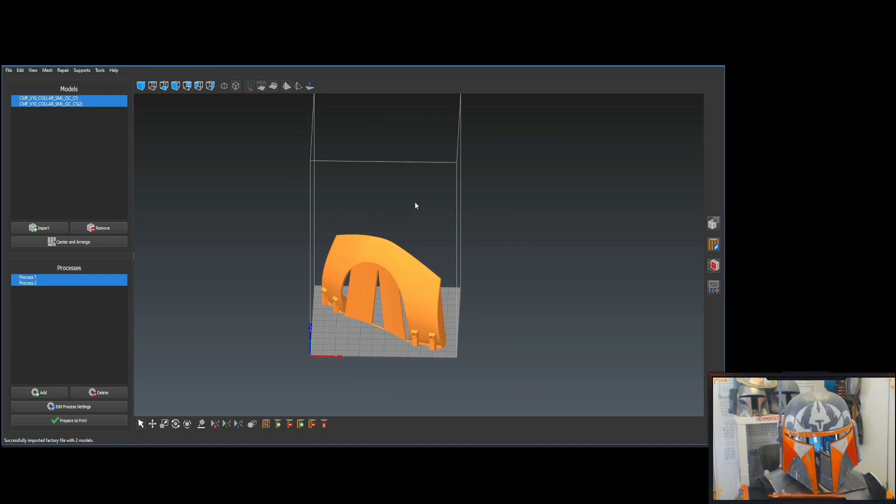Let's bring in - I just did a chest plate and a collar plate, so let's do a collar first, and we'll bring in the small because that's the standard size. I've already separated these parts out, but let's say you just brought it in as one piece, so I'm going to combine this back.

This is Simplify 3D, Cura, Prusa Slicer, and now Orca, the new darling of the free slicer crowd, and it's really nice. I'm probably going to start using that exclusively here soon. They have similar functions - in Simplify 3D it's separate connected surfaces, in those other programs it's split to parts or split to objects, and those are different. I have a video addressing that on the YouTube channel that talks about it specifically across all the different slicers, so go check that out.

So you'd want to separate your parts, and now you're going to have, in orange, here's the model. This is what we want to keep, and this is what we want to get rid of. So we're just going to delete this - this is what you'd do in one of your other slicers too - and then we're going to export this.

We're going to export it as an ASCII STL or even an OBJ. Let's do it as an OBJ, because the ASCII STLs, for some reason, when exported out of this program, are very large files. So let's just create a blank folder.

I'll call this Armorsmith Demo, and let's call this the V10 collar. We're going to get rid of CS because it no longer has custom supports. And we're going to go ahead and bring this into Armorsmith.

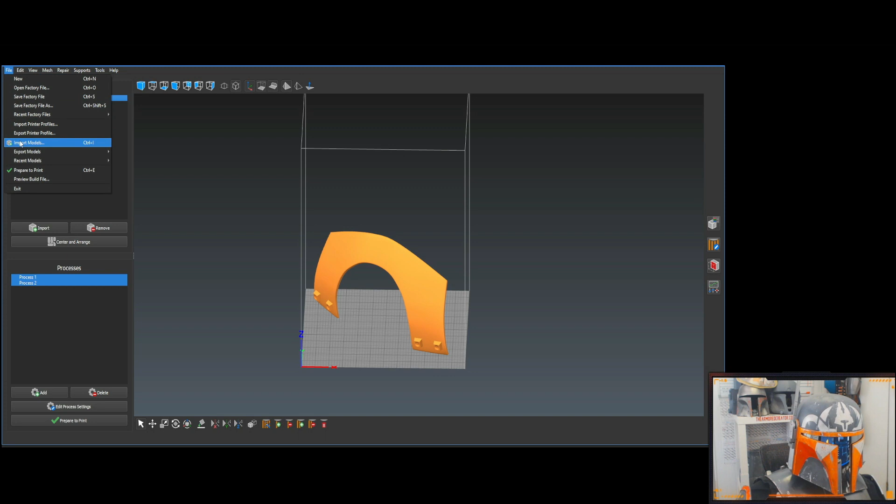We want chest plate, alright let's go. Oh, why is it going back here? No, that's a factory file. Okay, we want to import a model - sorry about that, I know I'm totally dragging ass here. Let's go ahead and get the right model. We want chest plates, and they are not in this folder, they are in here.

2022 updates again, and here we go. All right, so let's bring in this one - actually, bring in this one. Oh, look at this, we don't have the custom supports. Okay, cool, so let's just go ahead and bring that into here.

Let's catch up on the chat. We're caught up - wow, quiet morning today.

All right, so we've got two pieces of armor here. Now what do we do? Okay, well here's a really cool thing - so you've got your avatar, right? So you're going to select your piece of armor, and you're going to go down here to attach.

And you'll see it brings up all of these little cog wheels all over the model. There isn't one really for the collar plate, so what I'm going to do is just attach it to the neck. All right, so here we go - now it looks really strange, right? It's all in the wrong place.

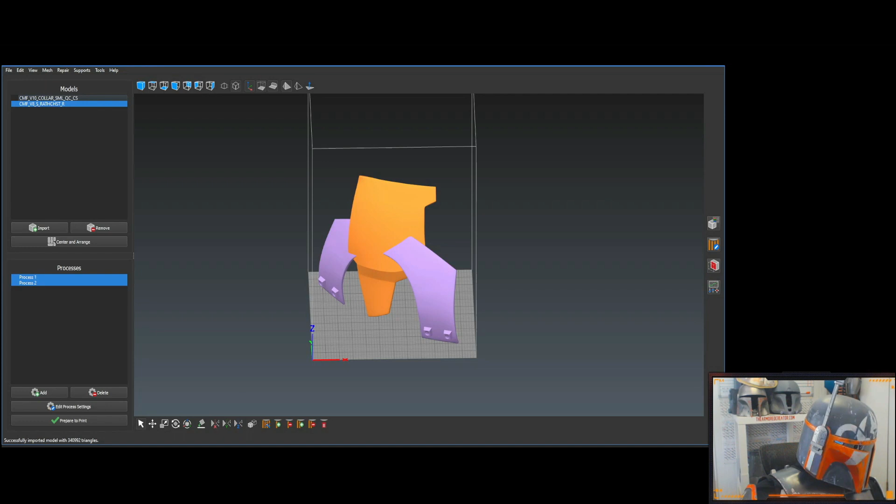When we had this collar plate open in Simplify 3D, we have it at a very strange orientation. We've got it rotated straight up and down, so let's hide this, or just delete it actually.

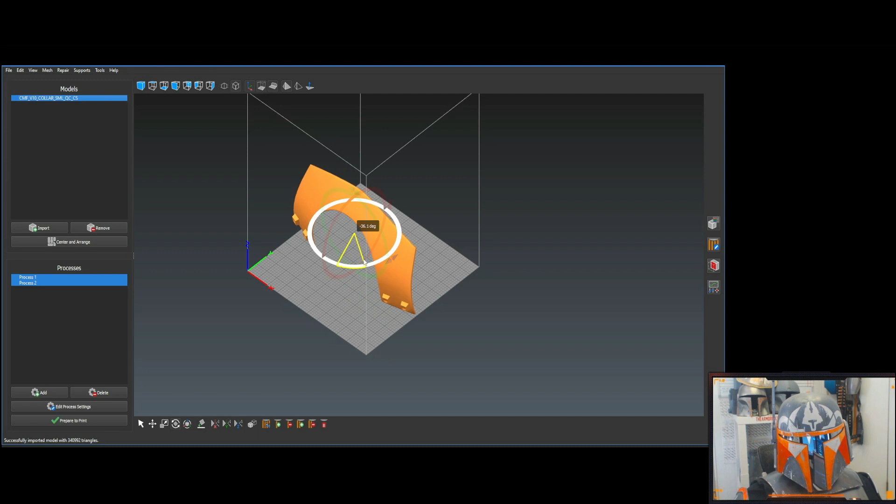What you might want to do is pre-position your STLs before you bring them into ArmorSmith. Don't change their scale yet, just pre-position them so they're more into the correct orientation that you want. We can verify this by looking down and lining up with this grid here. Let's get that again because it's moving around. There we go, okay, so that looks pretty good right there.

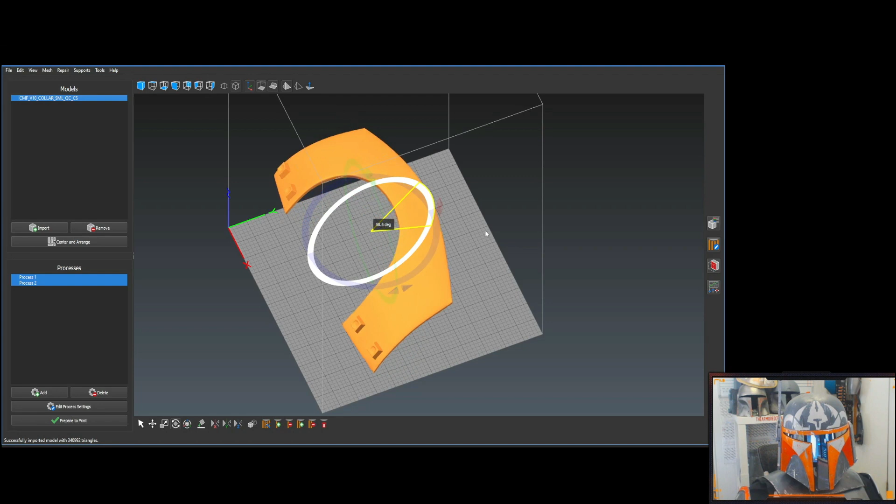And then we're going to rotate this thing from the side so it's more in line with what it should be. And then I think we need to flip it around 180 degrees. So we'll go ahead and re-export this.

And we'll re-export it as an OBJ. Go back into blends. Where's my customs? Oh, I guess that's out here. Customs, alright, and we'll resave it.

And now what we'll do is we'll open ArmorSmith back up, and we're going to select this and delete it. Then we're going to re-import it again, this time using the import button, and go back to our folder that we need to be in. That's not it. Alright, here we go.

Alright, so we got this again. This should be more in the correct position this time, I hope.

Sometimes when you export things as an OBJ, in fact, let's try that. Let's export this thing as an STL and see what happens, see if there's a difference in the orientation of the model that's exported. Export as STL. Alright, we're in the same thing, so we'll get rid of the QC and CS because we don't need that.

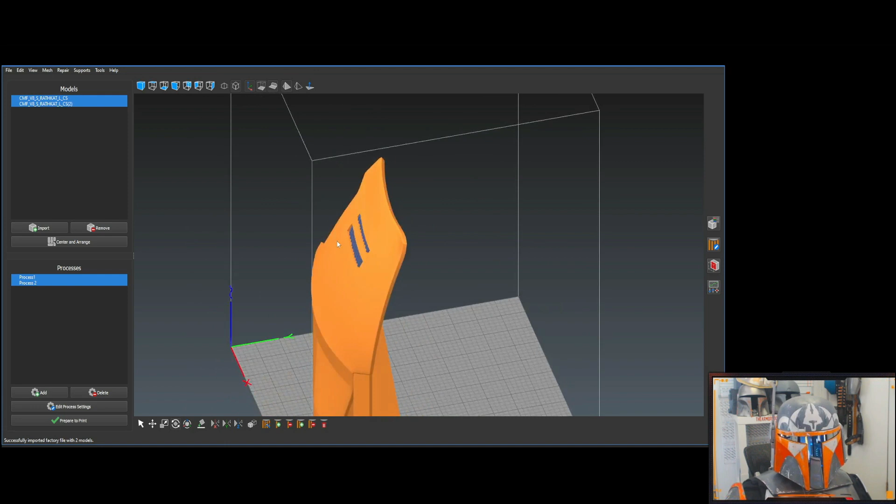So all my different sizes of this chest plate have the same size opening in the front and the back. I'm going to clear everything off. So here's what you want to do to be sure about how to scale this thing, because you can scale in your slicer too. You could use ArmorSmith if you wanted to get a good baseline scale. So let's remove all the supports. Let's delete the custom supports, and we just have to make sure we don't save this file.

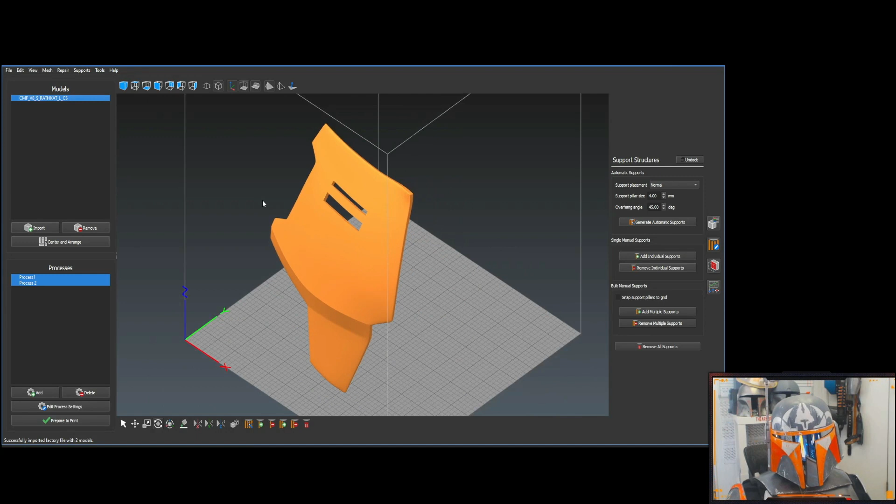So all I want to do is rotate this thing down so the opening is lined up with the build plate. Let's go the other way. Where's the top? Hello, thank you. Okay, so we're going to line this up, and on this grid each square is 5 millimeters. I don't know if you can set up units in your slicer to be either imperial or metric. Perhaps you can. Again, I prefer the metric system.

So all I have to do to get an idea of how big this thing needs to be is count the squares. There's 1, 2, 3, 4, 5, 6, 7, 8, 9, 10, 11. So we're looking at about 55 millimeters right there. All right, so let's scale it down and see how much that is. We go over here, we're on uniform scale. Let's go 98%, and let's see what we lost.

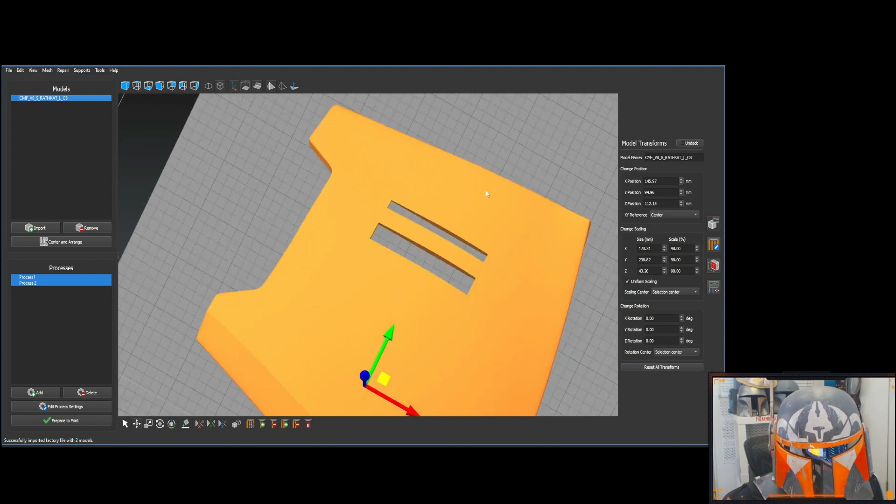Doesn't look like much. It looks like we lost about 1 to 2 millimeters off the dimension. And I think I actually provided a little bit of wiggle room in these. So a lot of it's going to depend on who made the plate, but scaling will definitely influence it. Now, if you go bigger, it's not going to be as much of an issue. But it can be, because on the Katso prop everything's attached to one circuit board, so you can't change the distance between these two displays.

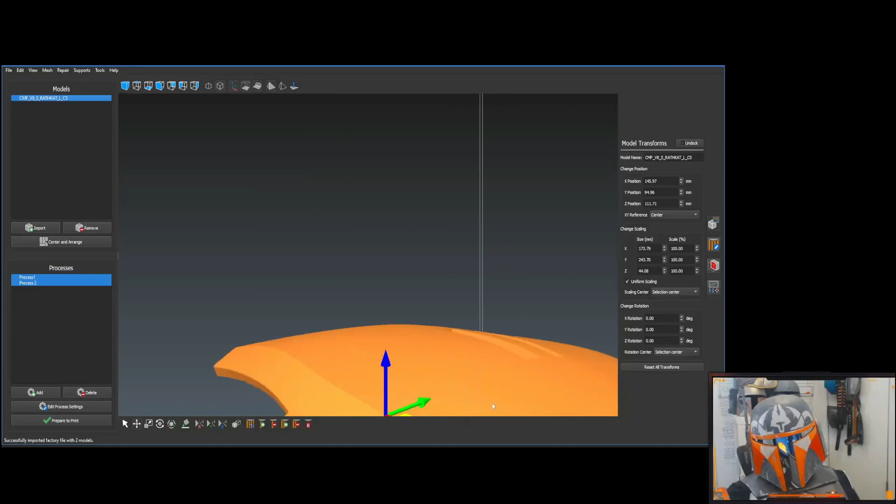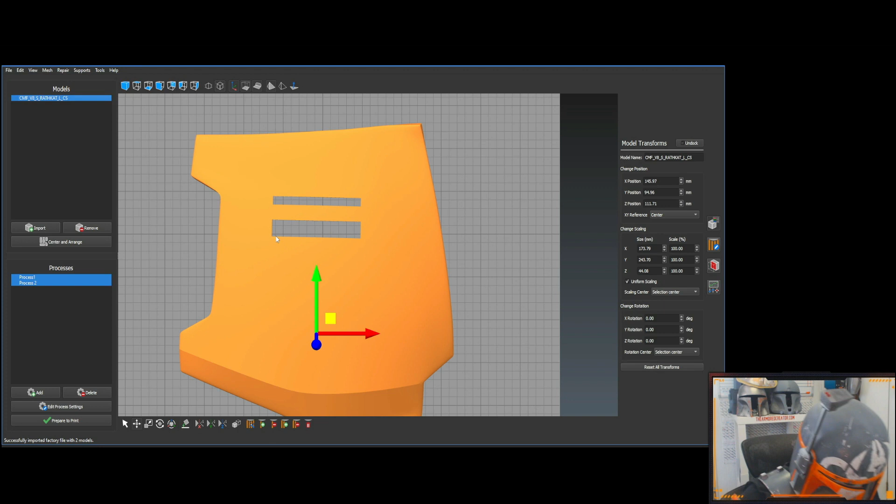Now some of the other makers do have these separated on their own boards, which gives you a little more flexibility, I think. Katso, I think, was one of the first to put these out, but I could be wrong. I just bought his, so honestly, I really don't know. But yeah, scaling will definitely impact this. So hopefully that helps. Maybe you want to make the plate shorter or taller. You can scale. So here's something to keep in mind. Let's undo all the scaling that we did.

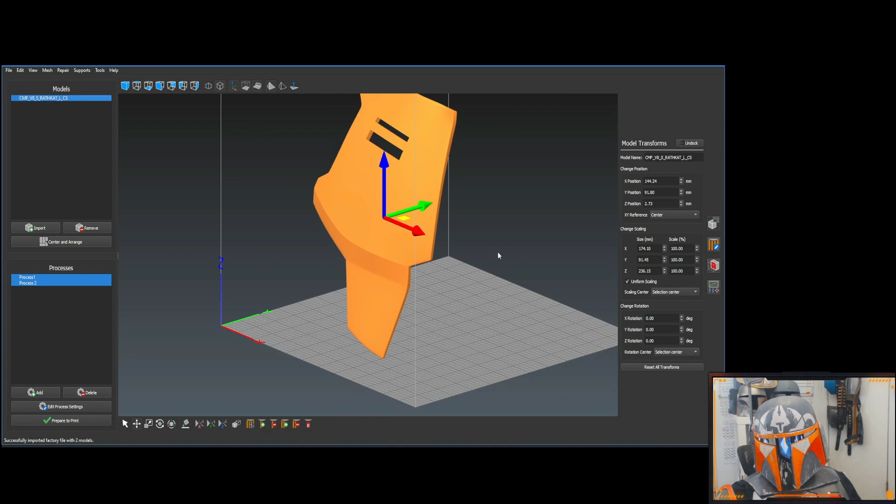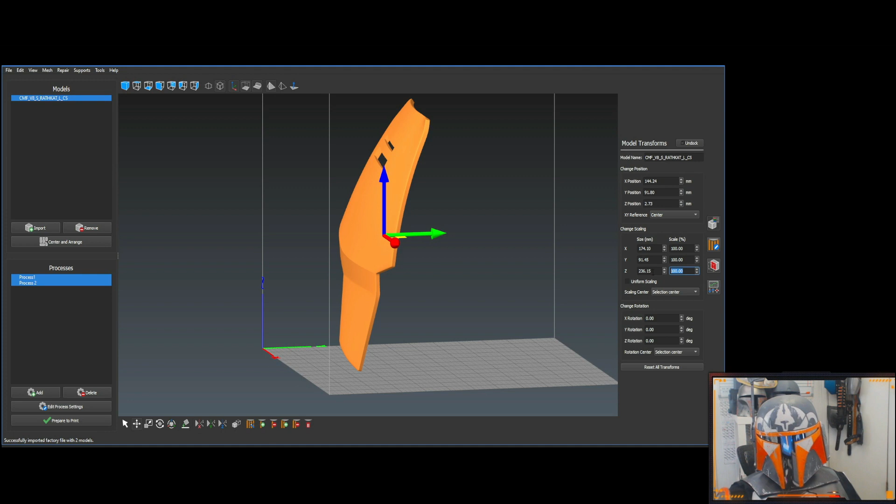How does the position of the model affect scaling in your slicer? I'm going to show you. We've got this coordinate system. Blue is usually Z, green is Y, which is front to back generally, and X is left to right, along a flat plane. So if we turn off uniform scaling and scale in Z, let's take it down to 80%, just to get a really exaggerated view. It's pulling everything down, but because the plate is rotated back a little bit, it's going to distort that scale a little bit.

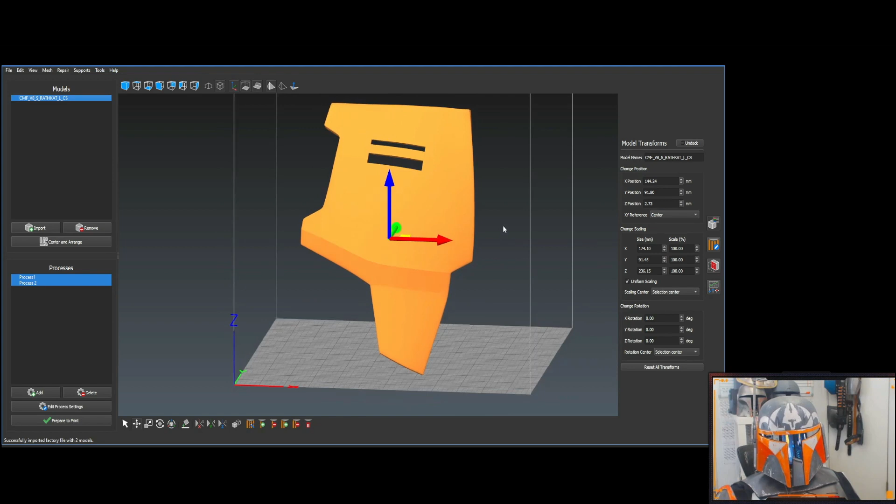So if you're planning on scaling along a particular axis, let's say you want to make this plate a little shorter on Z, go ahead and rotate it using the manipulators and get it as straight up and down as possible. And now we'll scale it to 80%. You can see that's much cleaner, everything's pulled together correctly. It didn't do this weird diagonal thing like before. So the orientation of your part when you're scaling in your slicer is really important.

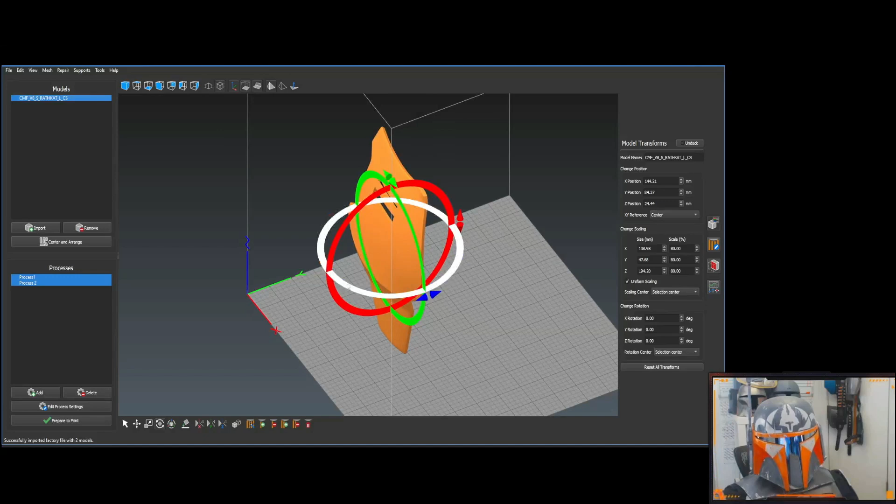A lot of people have asked me about the gauntlets. Let's bring those in. Let's bring in a gauntlet. Okay, let's just go ahead and import a model. You know what? I'm going to make a whole new scene here because I'm afraid I'm going to save over something. So I'm just going to add a process here so we get the right build dimensions. This is for my artillery.

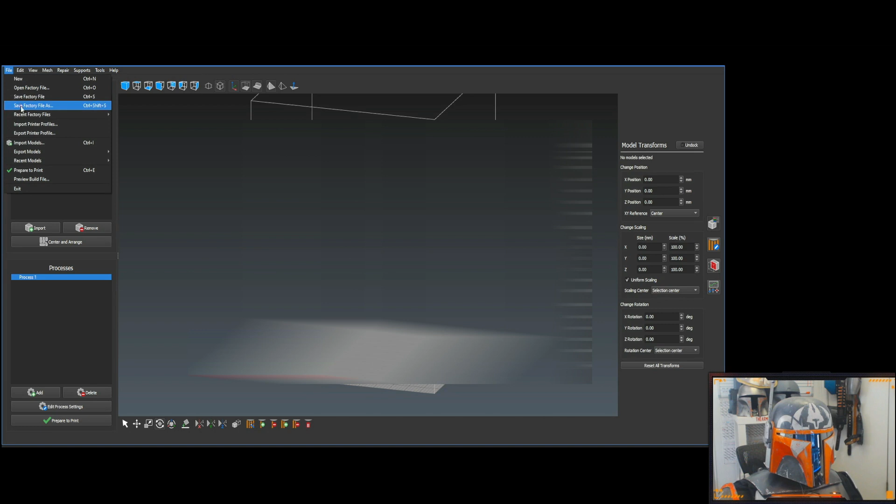So let's go ahead and bring in the pauldron, or the gauntlets. Blends, HK gauntlets, production, STL, Gen 3. Let's bring in the left gauntlet. Okay, so we go under chassis here. I have them with supports and without. So let's go ahead and bring in the top and the bottom. And they're basically ready to go.

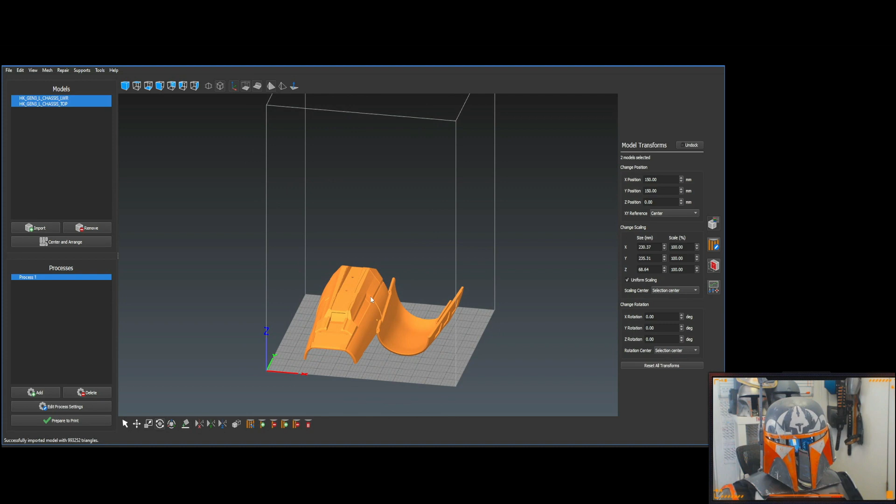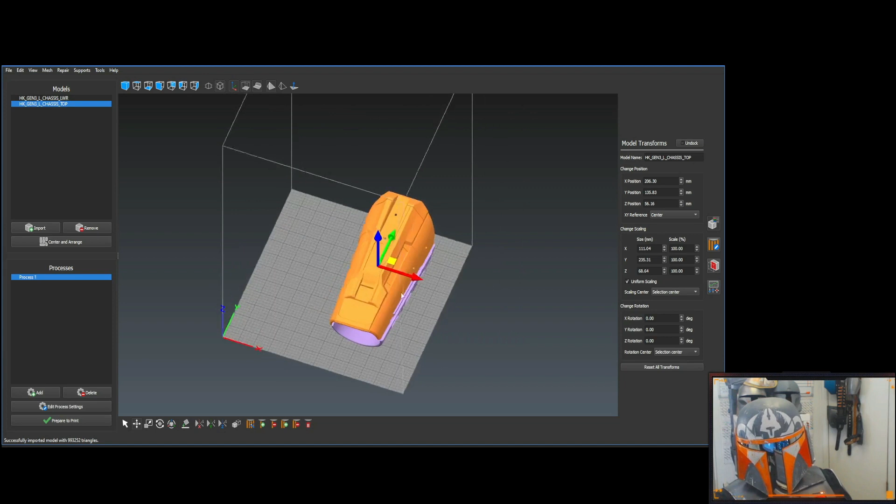And we can kind of do sort of a loose assembly. This is cool. So if you want to put these together in here, I'm going to show you how to turn this into one model so you can bring it into ArmorSmith to get it scaled for you. Okay, so kind of line them up. It doesn't have to be perfect, but it should be as close as you can get it. Get everything lined up. You've got lots of different views you can look at. All right, so we've got that where we want it.

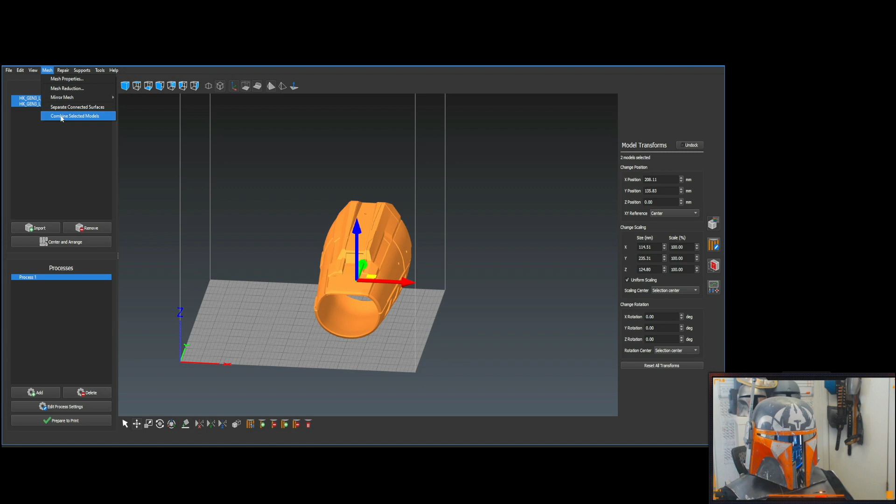Let's go ahead and select both pieces, and we're going to go up here to mesh. Now I think you can do this in the other slicers too, though this function I have not explored as much. I know it's not the same as grouping, so grouping is not going to be the solution. You want to combine these into one model. Okay, so we're going to go combine selected models, and then we're going to export, and we're going to do this as an OBJ.

Let's go ahead and go back to where we need to be, customs, ArmorSmith, exported, and we'll just save that. And now we'll go back to ArmorSmith, and we'll bring it in. And I'm going to show you two different methodologies here. So first we'll import this. Let's see. Where did we put this? Oh, did we put it in exported? No.

Where's the chassis that I just imported? Oh, I don't think we're in the right... No, we are. Did I not save that to the right spot? Or is it not finished yet? Oh, you know what? It may not be finished exporting this. It says it exported it, but let's see where it exported it. ArmorSmith demo. Oh, I did put it in exported. Okay, well, let's put it back in here and make sure it's done. Okay, it does take a moment to export the model when you're doing this. Okay, so now it's done.

So let's go ahead and import it, and here it is. Okay, let's open that up. And then we're going to attach it. Did we finish importing it? Okay, so we're going to select this little cog here. And now we want to kind of be in local, I think, because here's where local is really helpful, because we want to stay with the orientation of the arm here. So now you can see our rotational manipulator is lined up with the arm. So this is where local is really helpful.

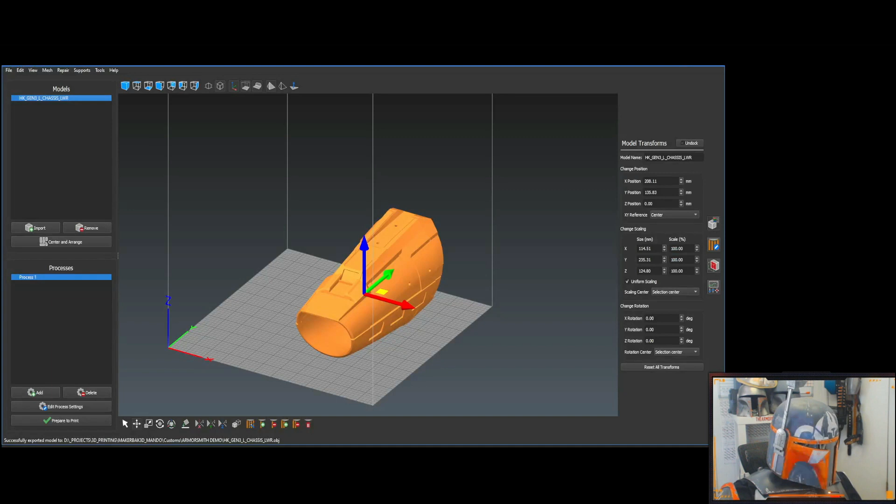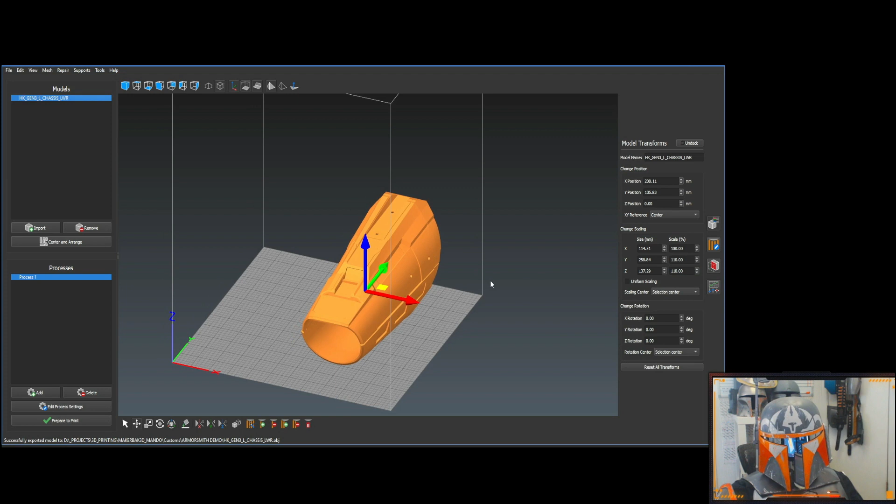So we know we had to scale this way and this way. We went 110%, so we're going to scale. This time we're going to scale on X and Z again. So we're going to go 110. And then we're going to go 110 down here. Okay. No, that should be 110. Come on. 110. Okay. So, that shouldn't have made it longer.

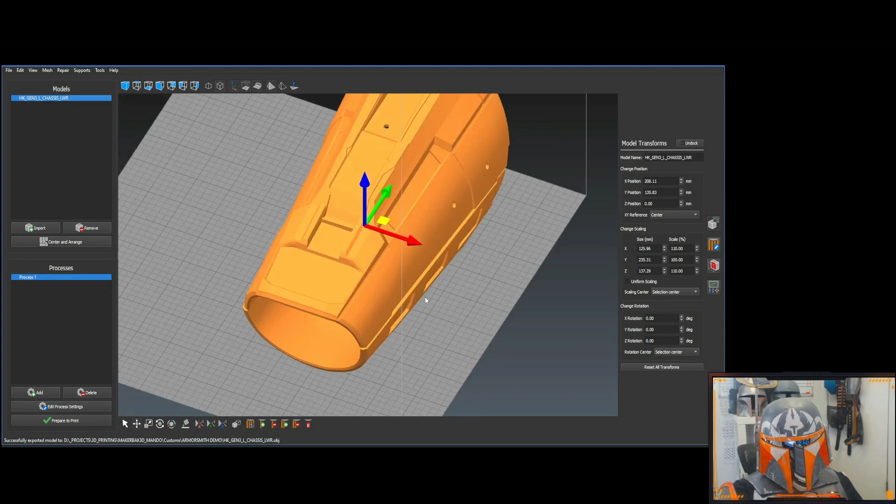I want to put this back to 100 just to make sure. Oh, wow. Okay. Oh, that's because we're scaling on Y. Duh. I keep doing that. Okay, there we go. So now we've scaled out on X and Z. So if you bring in one of the components that goes in here, like let's bring in the keypad, all right? So how do we make sure the keypad fits correctly?

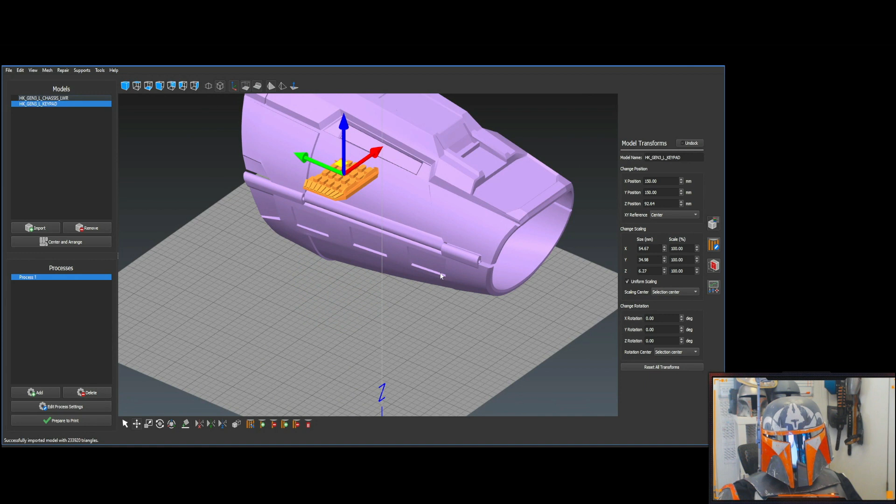We're gonna go, boy, I keep having to jump around all these different folders. We're in the left, let's go to details. This is gonna be the keypad, okay? All right, so there's the keypad. Lucky us, the keypad is already basically in the correct orientation. So all we have to do to make sure that it fits correctly is apply the same scaling to it.

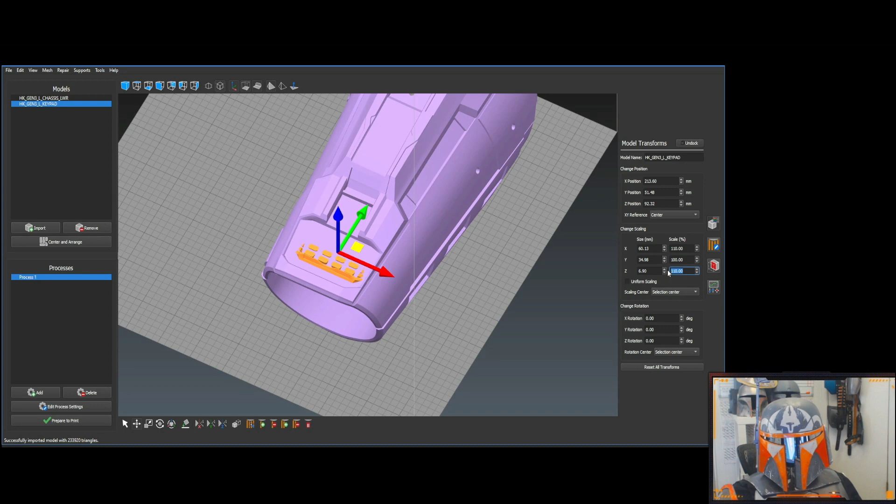So we're going to need to scale. Let's see what we did here. We went 110 on X, 110 on Z, and 100% on Y. So we're not going to do anything to Y. We're going to make sure uniform scaling is turned off. We're going to go 110 on X and 110 on Z. Okay, so now this thing should fit perfectly. Did I do 110? Yes, I did. Okay. And let's bring it up.

Did it change scale? Yeah, it did, I think. Do I have to go 120 or something? That's the Z measurement. Wait, what? No, not 102, 120. Okay, so that is too big. So let's go back to 110. And that should be correct. I know I made some allowance for parts to fit together correctly. Oh, and this isn't rotated and everything. It's not lined up with the parts.

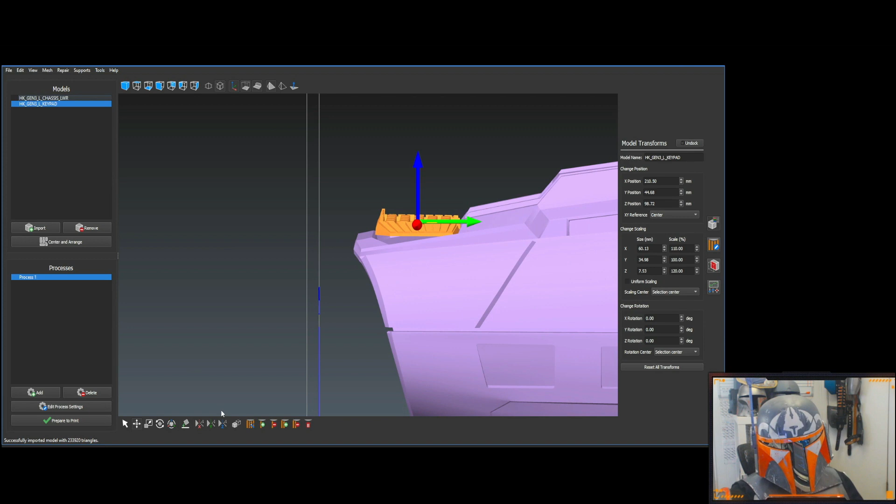So generally, yes, you want to scale all your pieces in the same orientation. Yeah, see, now that we've rotated it, fits really good. So the pieces that go in here, you want to do the same thing. You want to rotate them so they are oriented correctly, so that when you scale them, they're going to be the right size. So that's something to keep in mind.

You're welcome, Caleb. I'm glad you're getting something out of it.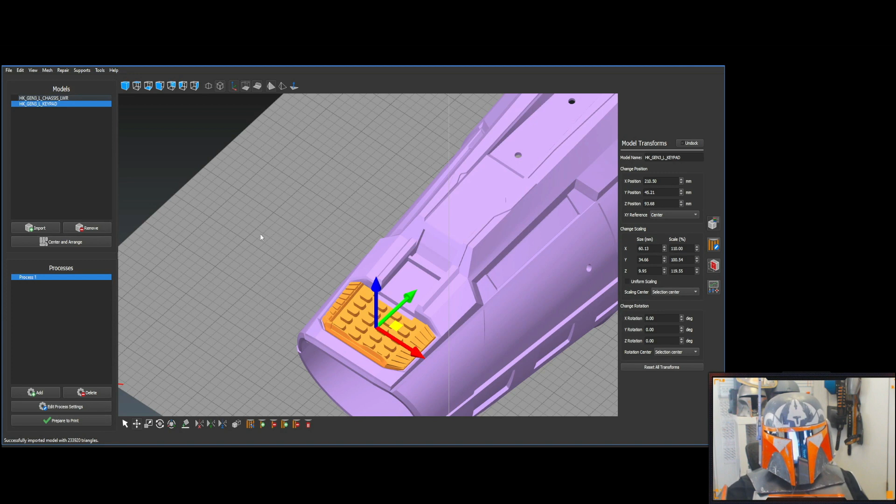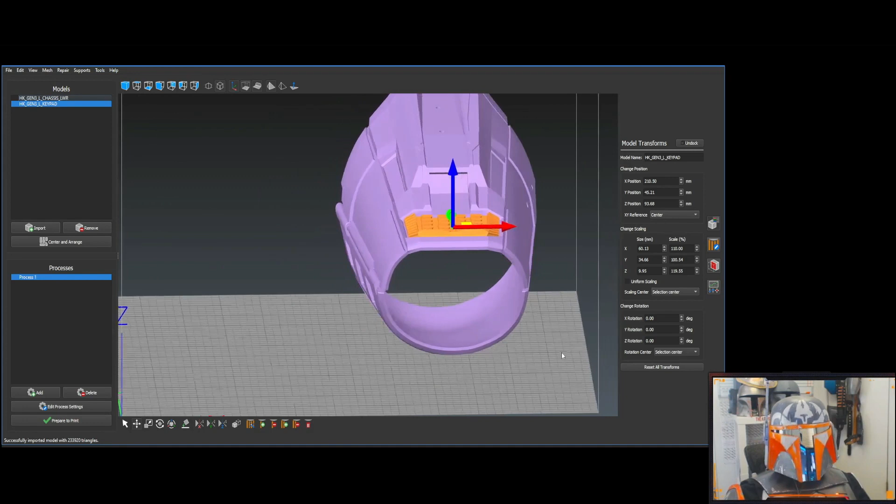That's great. Yeah, so a lot of people have asked me about the rod that goes into the gauntlets. The base gauntlet, when I first built these, the reason why you can scale them up to 110% is because that's how big they were when I first made them. And I realized that's probably going to be way too big for most people. So I scaled them down. I thought the length was good though. All right, but you can shorten them.

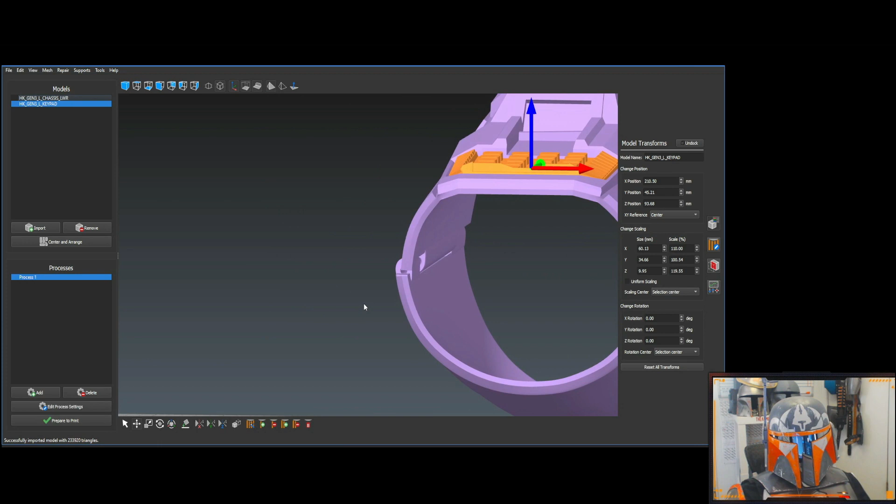But the original was scaled around 2mm rod, and I actually made the hole, I think, like 2.4 or even 2.5 millimeters. So it was a little bit generous, you know. And so when you scale these down, you're really not going to be making the hole that much smaller. And I have already tested this with the stainless steel rod at standard size. In fact, that's the reason why these are called Gen 3 90s, because they're 90% of what I originally built them. The 2mm rod will fit.

Now, if you go smaller, there are other options available. There is welding wire, which you can get. Generally, if you go in the hardware store, in the places where they sell screws and nuts and bolts and fasteners, they'll have a bunch of drawers and stuff. Somewhere in that department, they're going to have metal stock. Now, what I love about Ace Hardware is they sell K&S metals, which are like the hobby metals, the hobby brass, so you can get really cool brass tubes in square and round, and I just love that stuff.

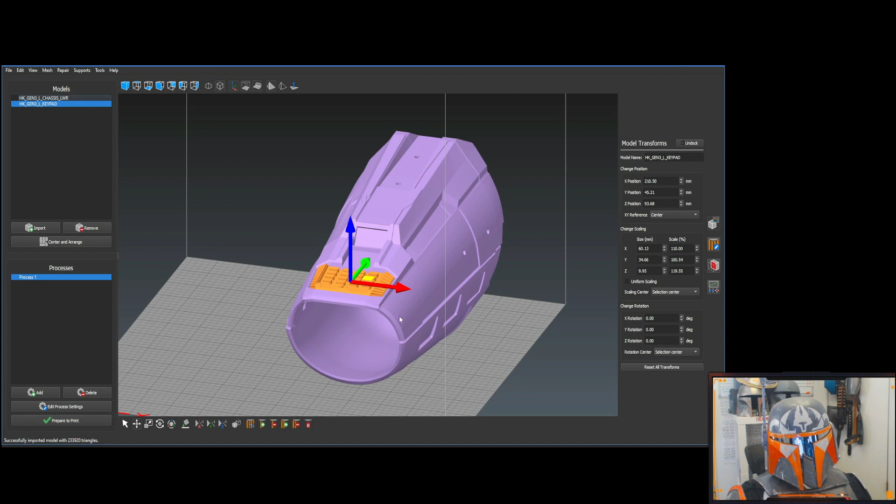But sometimes it's hard to find, but if I need it in a pinch, instead of having to order it on Amazon and wait a day, which I'm not complaining about, you know, I can go get it today. And hopefully they have it. There's like 3 Ace Hardwares here in town, so one of them is going to have it. So anyway, you can get this wire.

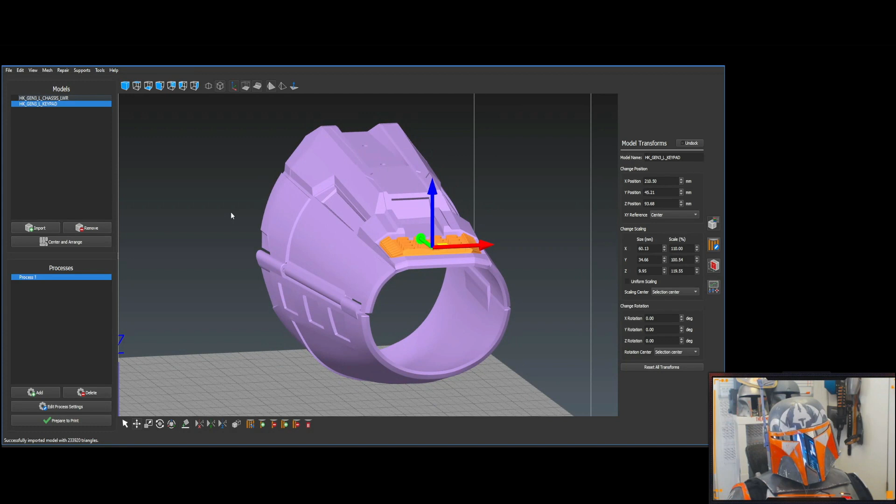They have this wire. It's called welding wire, and it will fit in there as well, and you can bend it and do all the same things and use it as a hinge pin. So if you went a 10% reduction, you should be able to utilize one of those things with no problem. In fact, I just made my wife's gauntlets, which are custom sized, and they're about 90% of this size here, and I used the welding wire for her, and it worked great. So it doesn't affect the functionality.

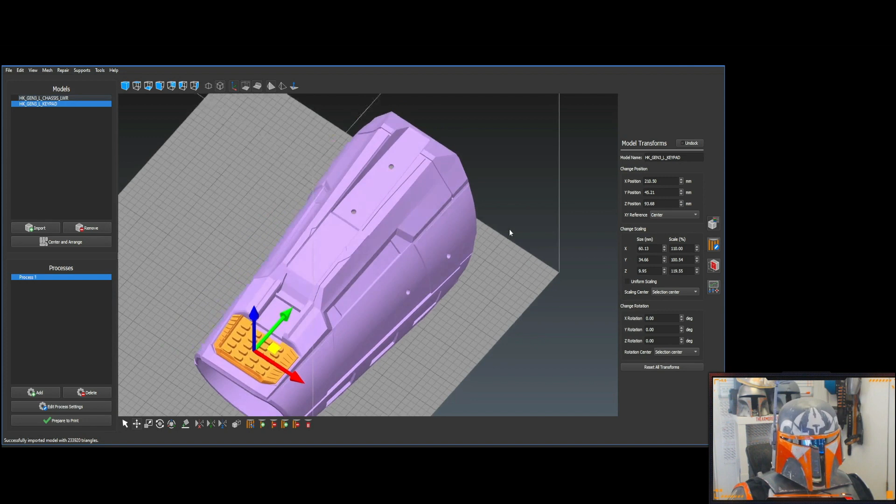Now, where you're going to have issues, your screw holes are going to get smaller. Smaller screw holes are generally not a problem. Bigger threaded insert holes may not be a problem, but you have to take a little more care with the installation of the threaded inserts because the socket's going to be a little bit bigger. So you may want to use something like JB Weld to create sort of a padding around the threaded insert, so when you set it in, you'll be able to make sure it's aligned correctly and your screw is going to go in straight.

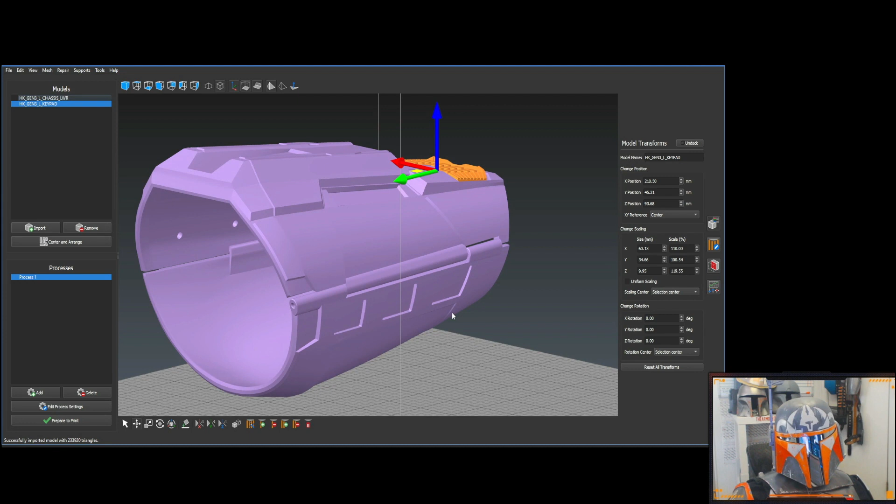I usually leave the screw in when I'm installing the threaded insert, and I kind of look at the part from the side from different angles to make sure that the screw is oriented correctly. I mean, oriented, not orientated.

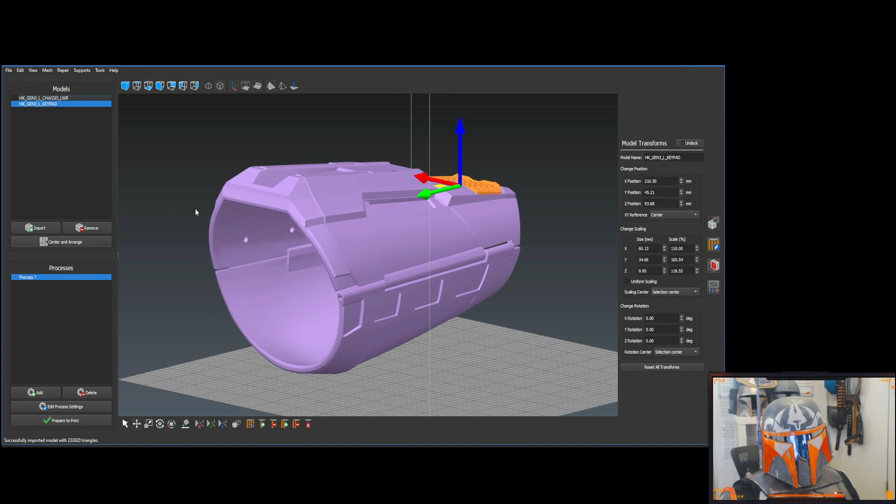It's an orientated fashion. Yeah, one of those words that I said wrong a long time ago, and it's now a joke. Orientated. There's no taters in there. All right, so anyway, I digress.

So yeah, that's scaling in a nutshell. Are there any other questions? You guys have any other questions about this? If you want, I can do another video on this.

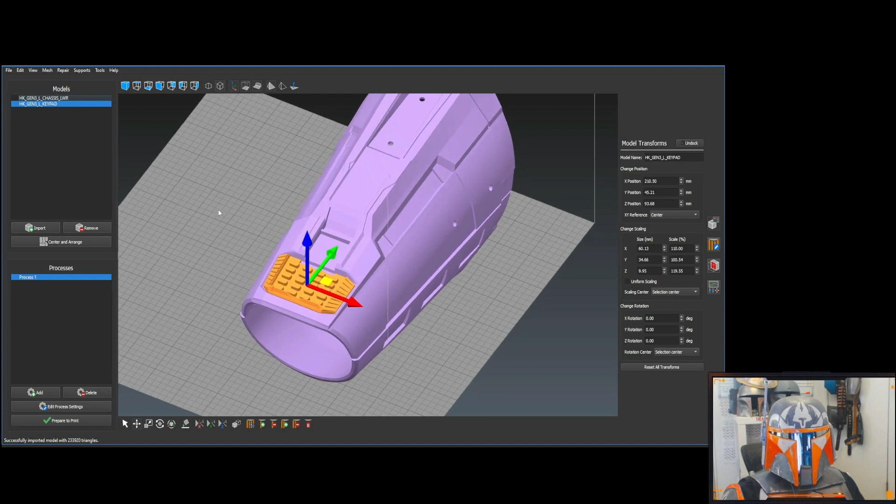But what you would do in Armorsmith is if you got the size you want, you don't have to necessarily export it out of here. In fact, I wouldn't, because it's going to export in this orientation, and you don't want that. That's just a total hassle. So what you would want to do is just take the scale information and scale it accordingly in your slicing program. And that's what we've done here.

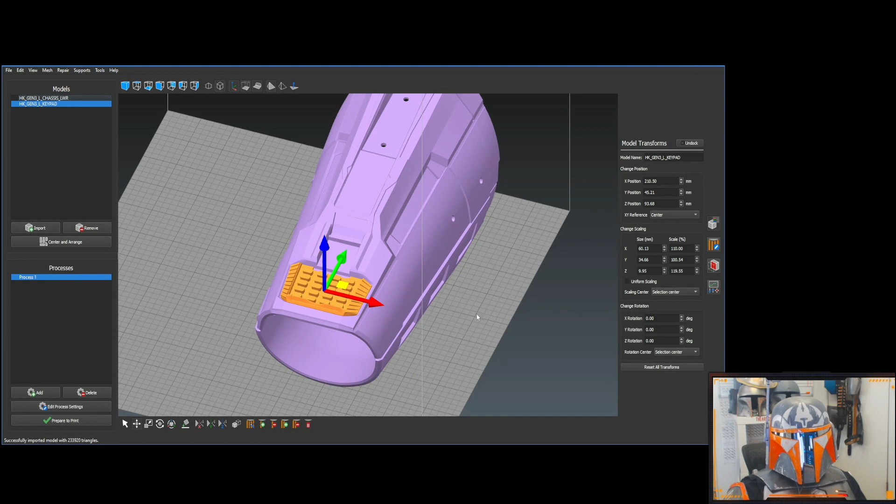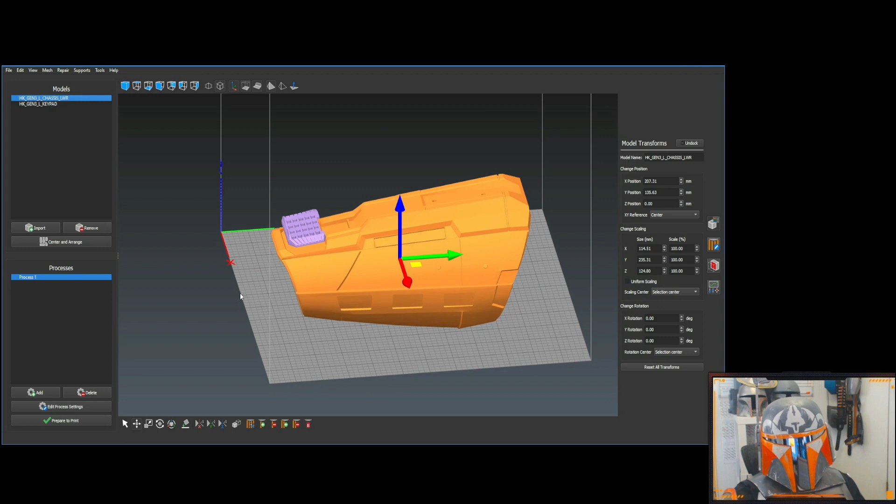And you want to always go along, like if you want to make it wider, because you could scale in this orientation too. You could have scaled like this. Let's put everything back to where it was. Let's go 100 and 100. You can also scale in this orientation, but basically you want to be aligned with one of the axes in the slicer's coordinate system. So let's rotate this thing up like this. Okay, so now we're straight up and down.

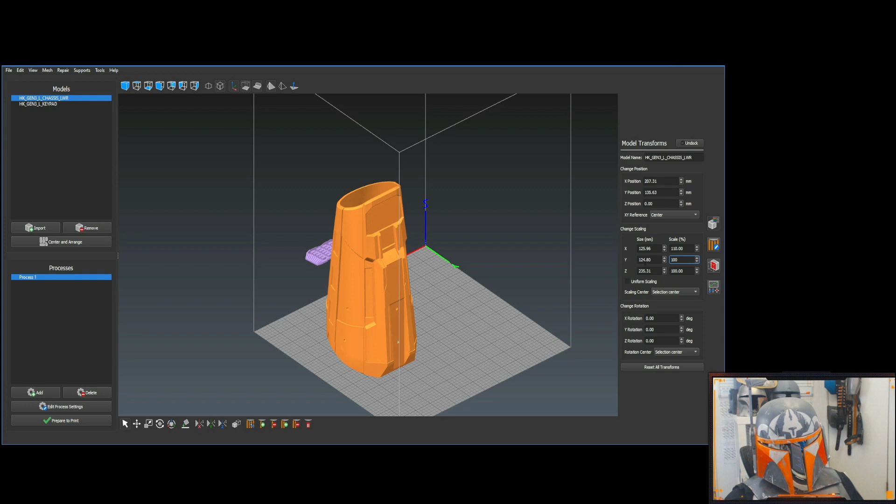So if we wanted to do the same scaling this time, we're going to scale on X and Y. We're going to leave Z alone, because our primary dominant orientation is up and down. So we're going to go ahead and turn off uniform scaling, and we're going to scale in X and Y. So we'll go 110. Whoop. I can type. And then we'll go down here and we'll go 110. Not 100, 110. And you can see it did exactly what we wanted to. It didn't change the height. It only changed the width. So now what's going to happen to all your things?

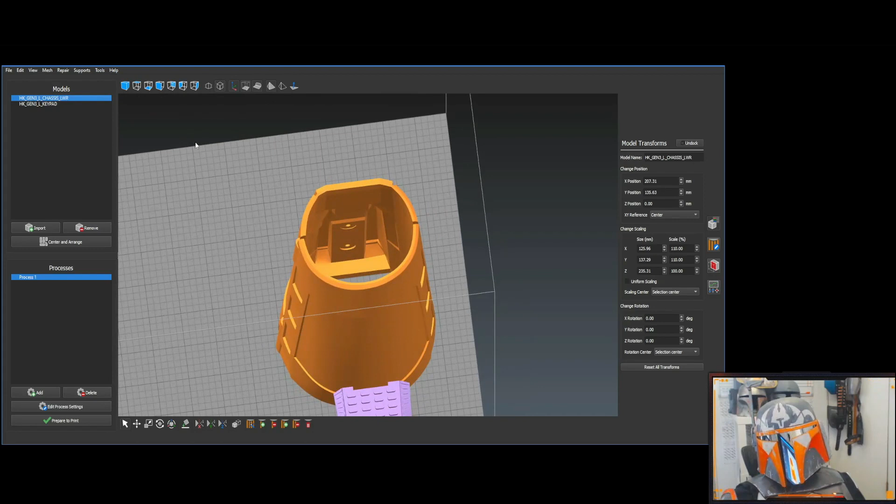Going bigger is generally not a problem, especially if you're only going up by a couple of percent. Obviously, the bigger you go, the more deviations you're going to have with regard to any hardware you're going to use. Going smaller is generally the problem. You can go a little smaller and probably get away with it.

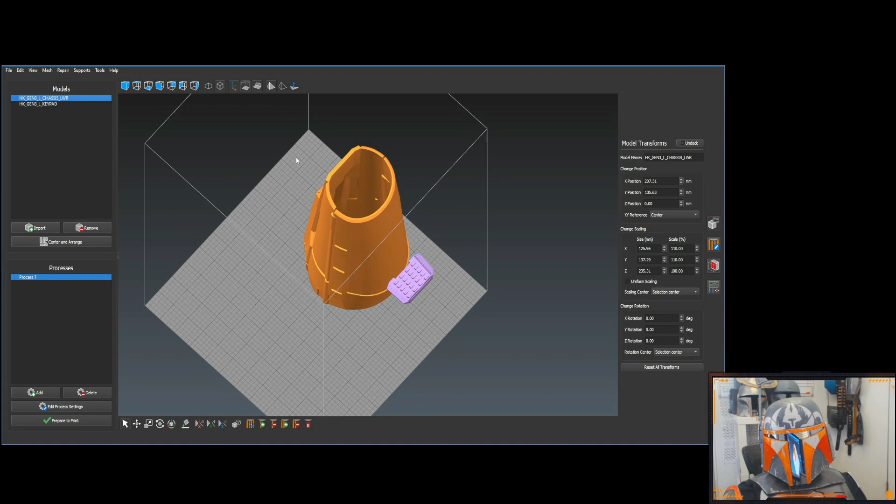What I would do, if you aren't sure if something's going to fit right, scale the part the way you want it. And in this case, let's just go ahead and separate connected surfaces now. Let's get rid of the keypad, because we don't need that here. What I would do is I would just get rid of half the model, and I'm going to get rid of the bottom half because the top half has the bigger hinge hole. So let's go ahead and scale this thing down to, let's just go crazy and go 90%.

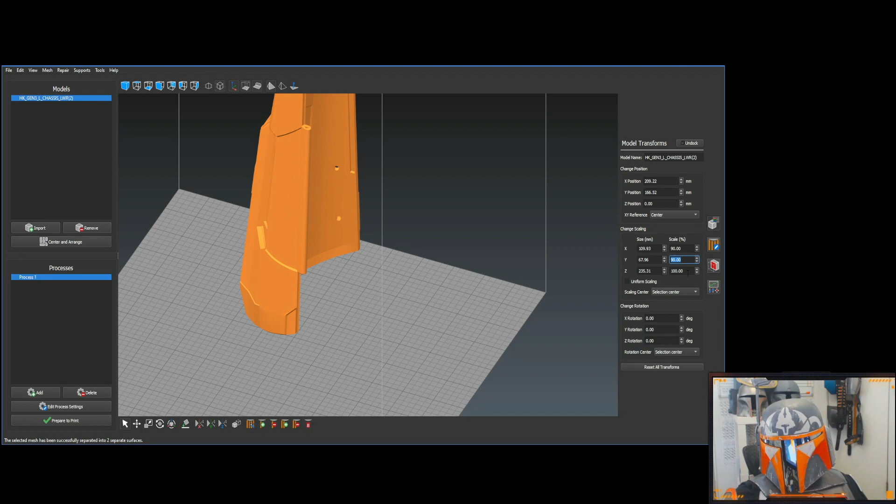And I guess we're going to have to do that on all of these here, because everything's changing. Now, if you're doing a uniform scale, then you can just scale all your other parts the same way. But again, you want to line everything up with an axial orientation. Line it up with one of the axes. It could be X, it could be Y, it could be Z. It doesn't matter. Think in terms of right angles when you're scaling stuff.

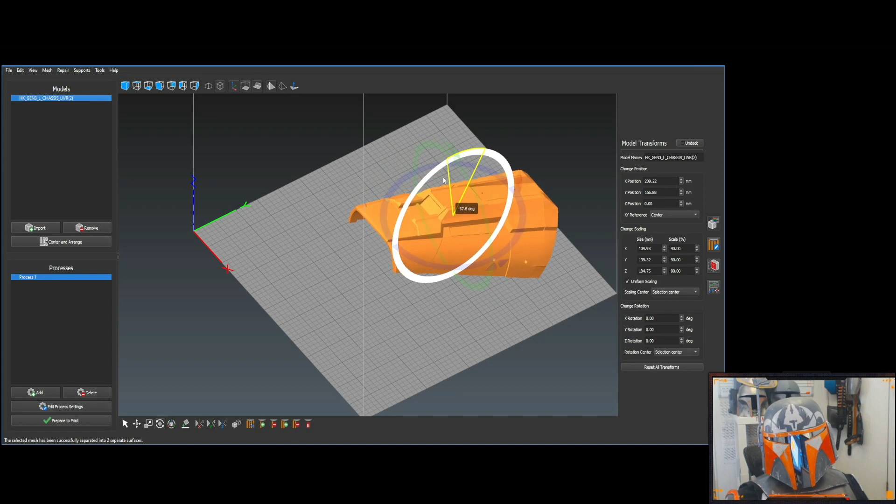Don't scale something that's sitting at some cockeyed angle like this, because that's just not going to work right. I mean, it will scale, and it will scale uniformly, but it's still got a better chance of being off. So the only thing we really need here in this particular instance is maybe this hinge, so we can figure out what size hinge we're going to need. We'll just pull this thing down below the build plate.

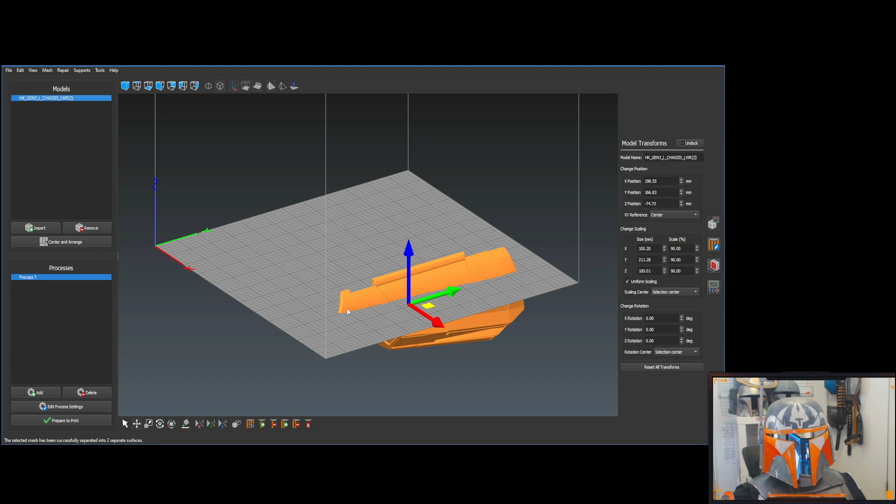Now, I know some slicers will not allow you to do that, so what you do instead is use their cut utility, and you can just cut the model right here and get rid of the part you don't need. This way you can just print this section right here, and then you'll have this tube. This will take probably 20 minutes to print, maybe a half hour, instead of 22 hours or whatever it is to find out you got the wrong size. So if you're sure about the size, that's cool.

Another thing you can do too is, if you wanted to check the circumference around your arm, just print the very bottom and the very top. You don't have to print this whole thing, just print this part. Just print this much of it and put it around your arm where you want it to go. Bring this thing down and just print the front end and see if it fits. And you can do the same thing with the bottom half.

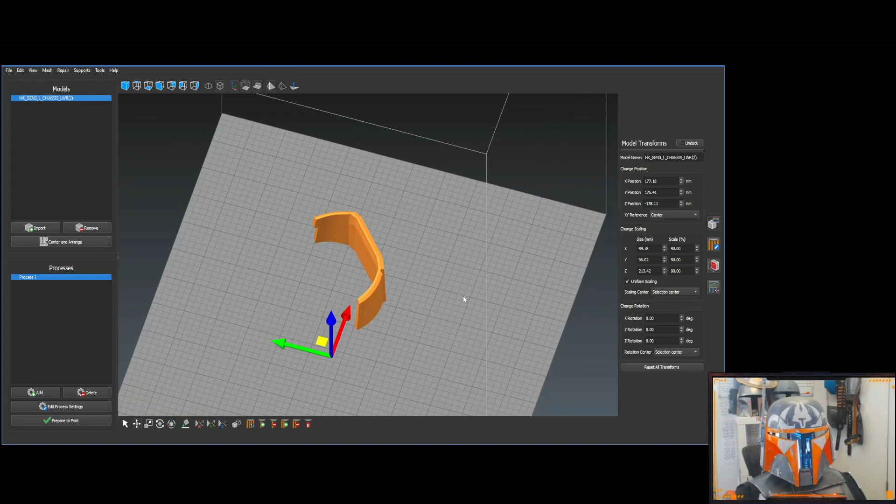So you can put it around your arm and check it to see if it's going to fit. And this way you're less prone to make a thing that isn't going to be usable, because you can check the size by just doing partial printing. So let's go ahead and get rid of that. And you know what? I don't think I have anything else to say about this.